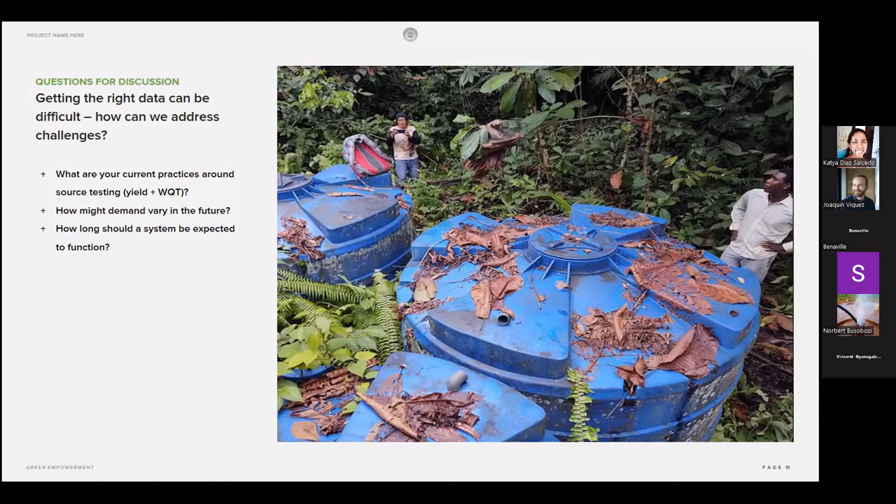Without further ado, we'll get into our second module here, which is the basics of system sizing. What should we expect to see in a solar system, especially if we're designing with a contractor, if we're doing a first design in-house, and a very first pass exercise of how we would size our systems.

So, looking at these two drawings of solar systems, one an illustration from the 90s, from the dawn perhaps of solar water pumping as a more or less financially acceptable option, and the other a very new illustration from the Water Mission UNICEF resource. As we look at these, we can see that really over time, this basic way of illustrating solar water systems hasn't changed all that much.

We're going to need our solar array, our rack, and our panels themselves, the structure that they're mounted on. We're going to need a controller, something that will condition the electricity coming out of the panels for something that will be used by our pump. We're going to be needing our well and, of course, our pump. In these cases, we're looking at submersible pumps. There are solar options for standard centrifugal pumps, but you can also connect an inverter and use a standard AC pump.

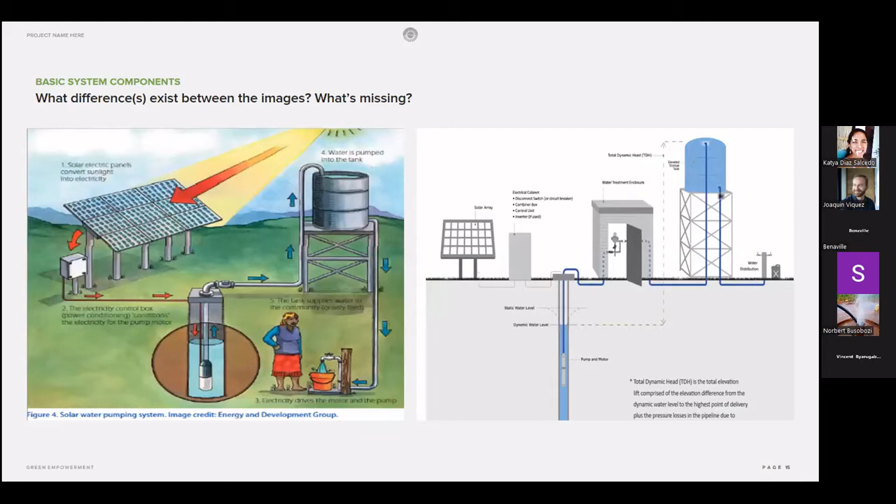We'd want to see some sort of lightning protection, ideally, for those panels, something to prevent damage during storms. We might need some additional treatment option beyond just chlorination. For example, if our well has naturally occurring iron, we may want to do some sort of treatment for that inline. Hardness as well, things that can really generate rejection of these water sources by the user population. And finally, we'd love to see distribution that wasn't tap stands. We'd love to see connections that had water in each house and a water meter, really thinking about what that next level of service would look like for communities. That's very basically what systems we'd expect to see in a basic solar design.

So quickly, some notes about what solar water pumping components are different from their AC or their genset equivalents. First off, the way we think about pumping in solar systems is slightly different from what it would be with other power sources. Solar water pumping is obviously limited by the number of sunlight hours that we have in the day. In equatorial conditions, we can get 9 to 11 hours of pumping depending on the size or the oversizing of our solar array.

So in many cases, we'll see a graph like this. We'll see a chart of the number of watts per meter squared, watts per surface area that we have of sunlight in an area. And we integrate that into peak sun hours, PSH, which is the equivalent of 1,000 watts per meter squared. So in a lot of cases, when we see that data, we'll see an equivalent in peak solar hours to what we saw there in overall solar hours. So don't be surprised if you're looking in literature, particularly older literature, and rather than seeing watts or kilowatts per meter squared, you see peak sun hours, one and the same.

So since we're pumping during this much more limited part of the day and not pumping between sunset and sunrise, we may need a comparably larger pump and we may need a higher yielding source in order to get sufficient water during that briefer pumping period.

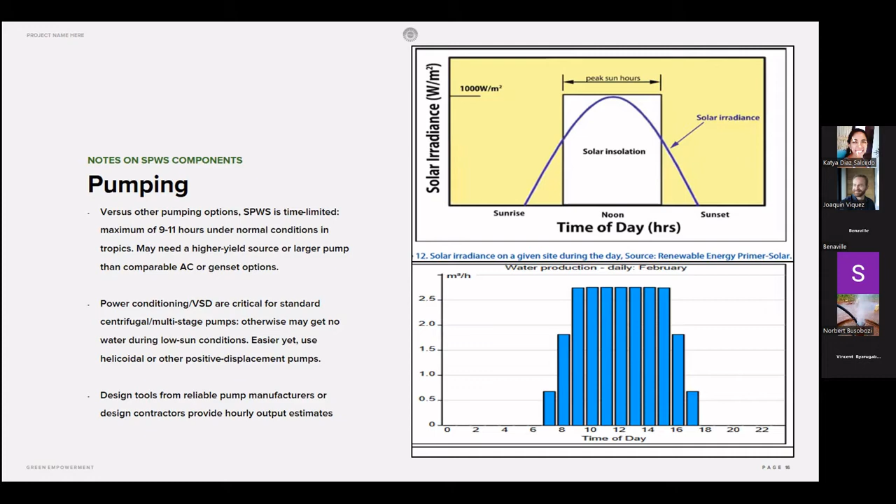Another change when we think about solar water pumping versus other pumping systems is that because we do have a little bit more uncertainty, right? The solar water system can be functioning perfectly, but let's imagine we had a few days that were cloudier than average. In those cases, we're going to need a larger reservoir to really make sure that we're able to sort of carry through those bad conditions and ensure proper operation of the system.

So the rule of thumb in many cases is that we want a full day's water consumption in our reservoirs. And in cases where we need to build water towers, that can be a significant expense, right? Additional reservoirs, really regardless of material, but particularly if we're working in polyethylene, if we're working in geomembrane, may not be that much of an expense if we can use a hillside location. But where we need to build water towers, this can be very, very pricey.

The photo here is a community here in Ecuador that about 20 years ago started in on building a water system and actually ran through their entire budget just trying to build the water tower. So half built for 20 years. We completed it about 3 months ago here with a local partner, and it's been functioning nicely, but goes to show you that a water tower really can suck up resources versus the other elements in our systems.

So if you do need to use water towers and they become prohibitively expensive, one option with solar may be to do the heaviest part of the lifting with our solar system and locate additional reservoir space or water treatment steps, especially if we need to do something that's space intensive like sand filters, at ground level, right?

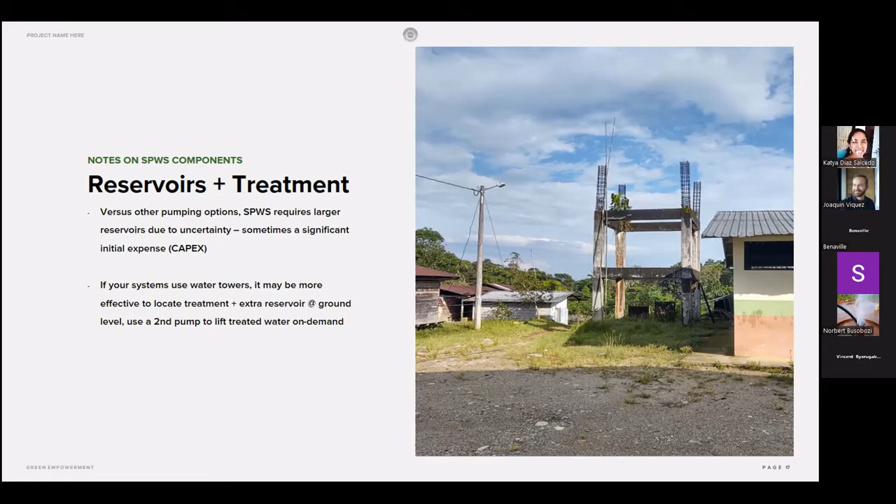So really, when we start to integrate solar and we need water towers, we need to be creative about how we're creating the most cost-effective solution for communities and the one that's easiest to maintain. So those are our different considerations for solar pumping compared to other pumping options.

Now, what should we avoid? What sort of shouldn't pass the laugh test if you get a proposal from a design firm, or if you get a proposal from an equipment provider, and you see these items, right? With all due respect, these people may not know what they're talking about. So what do we really want to avoid?

One, tracking arrays. Formerly, when solar panels were much more expensive, a tracking array, one that really moved the solar panels as the sun moved through the sky, might have been a reasonable option. But now the solar panels are so much cheaper than they were in the past that it no longer makes sense to have a complex mechanical system that you're going to need to be maintaining, right? You're much better off installing more panels, which is an electrochemical system, very simple, really needs very little maintenance, and a much cheaper option. Install a fixed array and install a few more panels. You'll thank yourself in the future.

Another thing to avoid are batteries, right? Very common to see this nowadays in designs. Battery technology has certainly come a long way, but for the moment, batteries are still a large expense, still a very complicated element, still something that's very failure prone, depending especially on storage conditions, on how well the wiring is done, and something that is almost never justified. In general, we want to let extra elevated water be our battery, be our storage of energy, right? If you can build a larger reservoir, there's your stored energy. You don't need to be trying to store electricity.

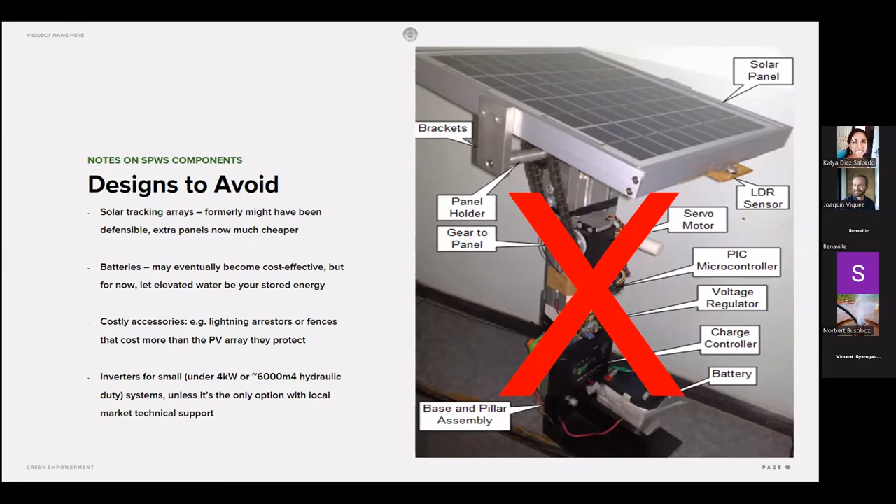Next, we want to consider how we're building for the future. Many things may be easy enough to do in a modular fashion. We're very, very big fans of using these 2,500 liter polyethylene tanks here in Ecuador because they're lightweight, they're easy to move, and it's easy to add additional capacity as needed as the population grows. So when you have system components that are easy to roll out in a modular fashion, things like reservoirs at grade, treatment, more PV panels, if you want to do a larger pump in the future, leave space for those in your initial layout. Nothing more frustrating than having to renegotiate land access when you need to put a little more reservoir, a little more treatment capacity in.

However, we don't need to over-design things, going a little bit towards Katya's question about how system design should be done for how many years, right? Basically, the components that are going to be a real headache to change out, things like pipelines, things where we need to be trenching, things where we need to be negotiating land access, those we should really design for their maximum useful lifespan, right? Design those for 20 years out, design those for 25 years out.

Going up a size in pipe is generally a minimal expense compared to the cost of trenching, compared to the difficulty you may have in reorganizing the community to replace that pipe in the future, right? And really thinking about what's our maximum access going to look like, right? Perhaps in the future, we'll go from single tap stands to multiple tap stands. Perhaps we'll go from multiple tap stands to household access. So really think about what your max flow rate may be, because the expense there is going to be minimal compared to the effort put in to install those components.

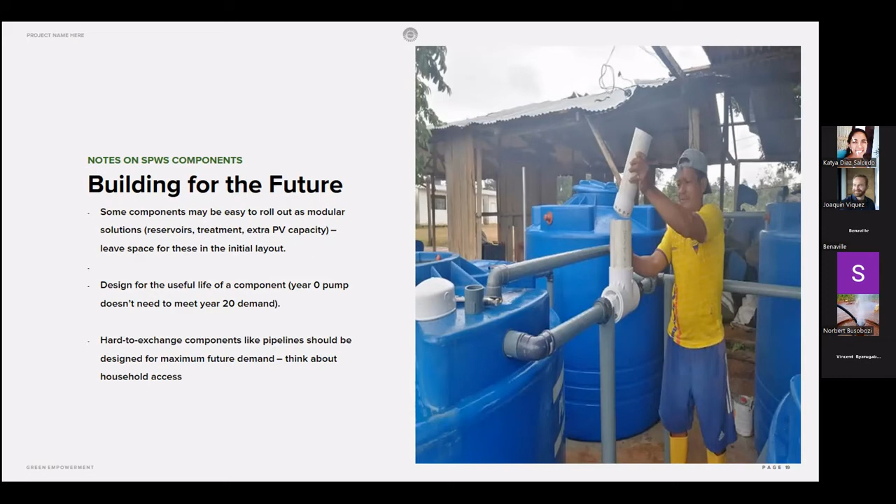So a quick plug for some Green Empowerment tools that we'd be very happy to share. Many national norms are really designed for larger systems, systems with 500 connections or more, or 500 access points or more. And so the ways that flow rates are calculated through pipes often don't really apply or are not sufficiently demanding for small systems, right? Imagine if you have a pipeline with 500 connections, the chance that all 500 will be open at any one point in time is very low. But if you have a pipeline with 2 connections, there's a very high chance that both will be open simultaneously.

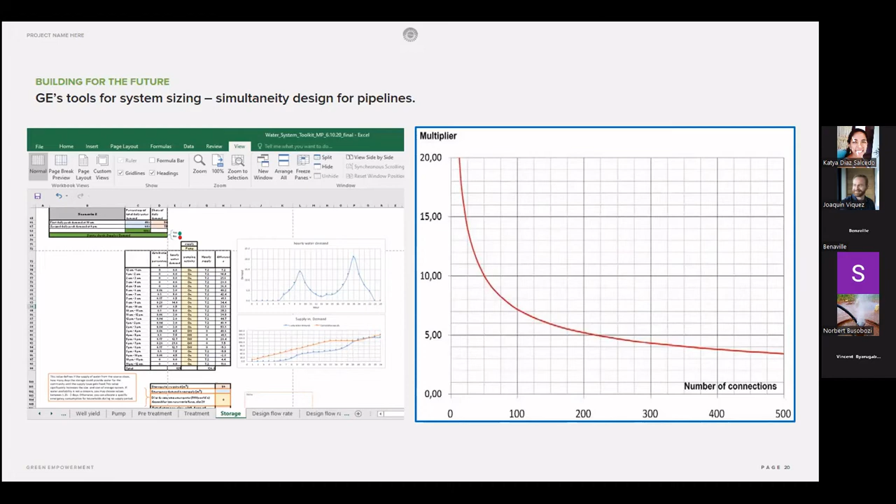So we really do like to recommend this design factor called simultaneity. And we've designed a handy little Excel tool that will allow you to design pipelines using that simultaneity factor and designing them also according to what time of day your consumption is occurring during. So we're happy to share those tools and also do a quick walkthrough on how they're used if there's interest from participants in learning how to use them. But enough of that plug. Let's get back to our example in Bihanga.

Yes, so maybe just to cut you short a bit, there's a question in the chat from Moses on theft. So he's asking, how does the bolt system protect from theft, since the thieves can undo the bolts at night when no one is there? So we just wanted to put that out before we continue.

Of course. So really, as well as being bolted in, we want to look for non-standard bolts, right? Don't use just a standard hex bolt. Look for something that's called a coconut-headed bolt here, or a smooth-headed bolt, that really requires special tools to undo. Or what we've seen be very functional in Nicaragua is to use standard bolts and then to weld a small strap of steel over those bolts, right?

We'll get into security a little bit more coming up, but that's a great question about what can we do, if not to prevent, but at least to dissuade theft. So we will definitely get into that in a little more depth, and I'd really like to hear as well any other experiences that folks have had in sort of theft-proofing systems when we get to that in Module 4.

Okay. Thanks so much. So going back to our example, right? We have a system there in Bihanga. So what size of solar system would we need to meet demand? What are we going to need? Going back to Module 1, we're going to need our estimated water consumption.

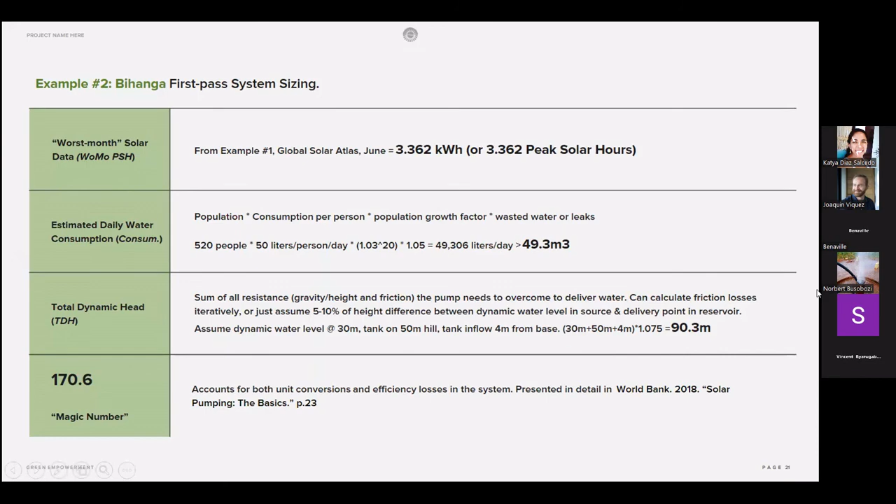Great. So using these 3 data points and our magic number, we can do a back of a napkin calculation, right? A very simple illustration here of Bihanga's system, our well, our hill, our tank. Calculate our total dynamic head, look online to get our peak solar hours or our solar radiation in the worst month, and our consumption. We just multiply consumption by total dynamic head, divided by our magic number multiplied by the worst month peak solar hours. This gives us our array size, right?

So using this for the Bihanga setup, we want to be delivering 49 cubic meters of water a day at 90 meters of head. In this site, we're going to need 7.76 kilowatts of panel. We can round that up to 8. So manufacturers' online design tools, if we're discussing those high quality manufacturers again, may use other estimates. Obviously, their calculations for the pump's yield are going to be a little more accurate, but we should see them align more or less closely with this back of the napkin calculation.

Now, what is this going to cost? If we're doing really a one-off system, costs can range from $3 to $4 per watt of array. And that's for the whole system installed, right? So that's the array, its rack, the pump, any sort of pump controller you may need, and the costs for installation, of course, profit for the installer. If we're doing multiple systems, or if it's an area of easy access, those prices may be significantly lower. But this gives us an ability to ballpark that for our Bihanga setup, we should be looking at $24,000 to $32,000 to install this solar system.

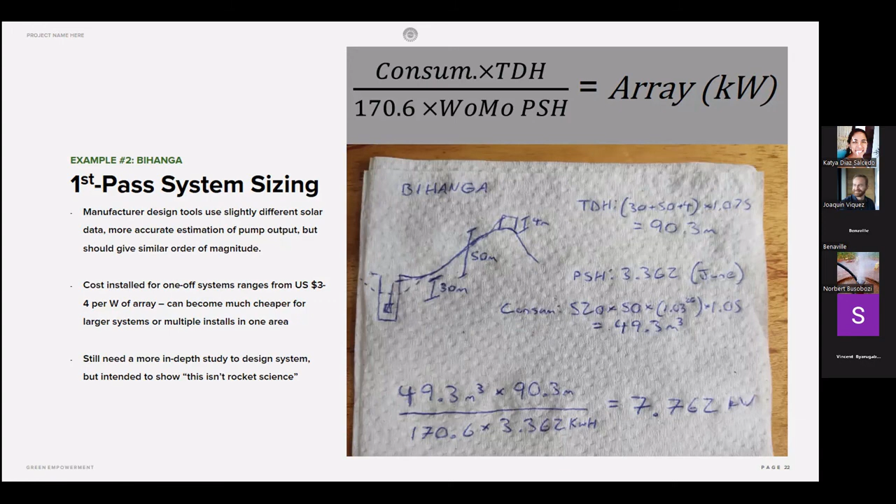Obviously, you'll need a more exacting design, but this really allows you to see that this isn't rocket science, right? This is not beyond the reach of anyone who's already doing water system design and implementation to really get ideas of how large of a solar system you'll need. And this allows you to really decide, is solar something I can consider, or is solar going to be cost prohibitive because either A, donor support is going to be difficult to get, B, this site may be abandoned within a couple of years and this investment isn't worth it, or C, I have other sunk costs. And so that's where we're going to get into now.